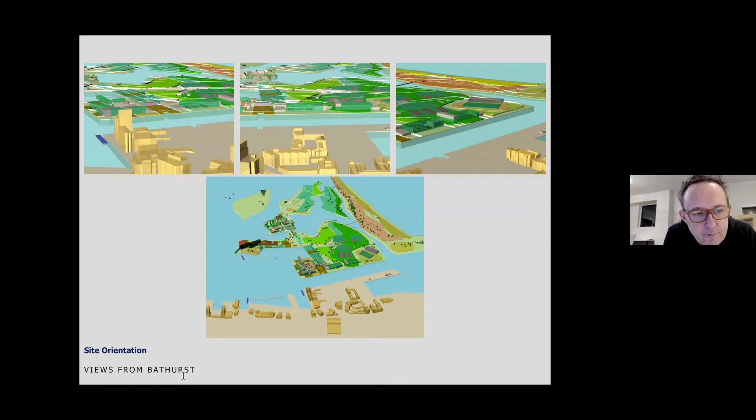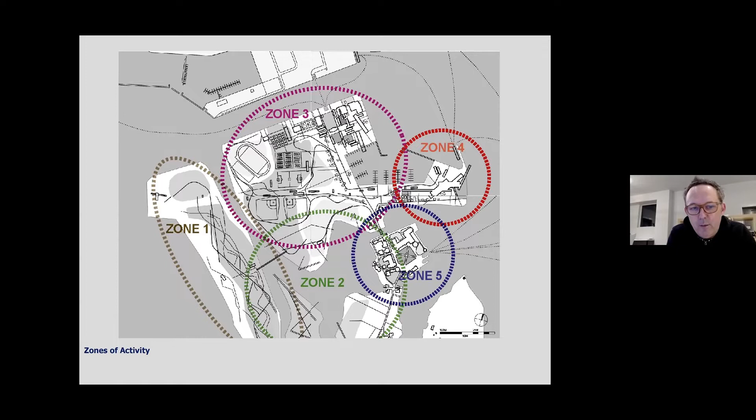At the time, we were very concerned about housing and things like that. Not that it wouldn't occur in this area, but rather you would have in one area at Hanlan's Point a kind of reconstituted Hanlan's Point, with possibly some bed and breakfast, some restaurants, and some overnight visitors—but you wouldn't really have people living in this area permanently.

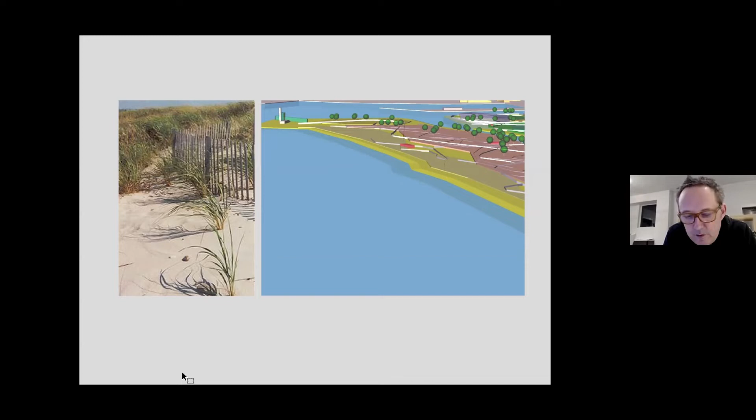So zone 1, beach and dunes. It's currently a beach, and a fairly secluded beach at that. So that would be maintained and augmented with various artifacts and fencing to help secure the natural environment along the beach—so it'd be like a dune park.

Zone 2, the quite interesting inner waterways of this newly reconfigured, or gradually reconfigured, site would really be a wetland and marsh area, accessible by small craft like canoes or kayaks. There would be boardwalks and various other natural features maintained, some small wooden bridges, et cetera, and it would hopefully become a habitat for birds and other small animals. It would be traversed through winding paths and boardwalks by weekend recreation, families, and other people that want access to the site.

So these are from our model—gives you, they're very abstract. We intended to keep this quite open-ended. Boardwalks—this is just an example of the kind of installations and things that might start to occur in an area like that.

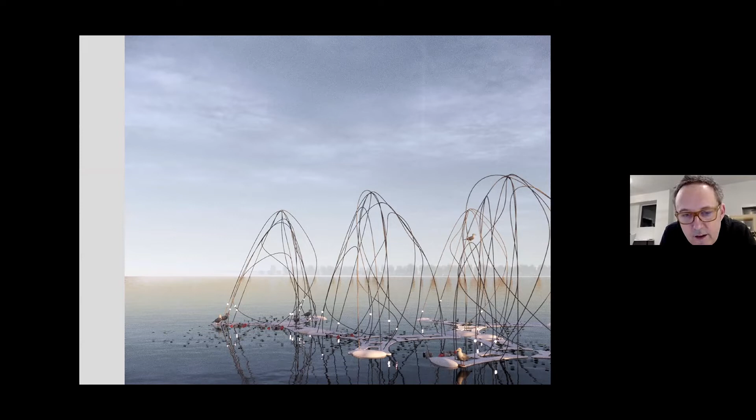Okay, zone 3, active recreation and markets. This is a pretty important zone really, because it is in a sense the interface between this new area that was the island airport and the city, for the most part. So what you have is the lower regions populated by sports fields, and the little tiny buildings you see would be like changing rooms and washrooms and things like that.

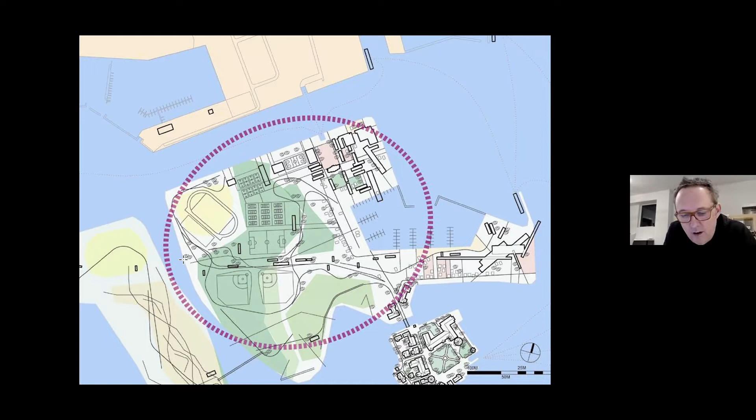And then up towards the upper part are the buildings that are the hangars and the airport itself, as well as the platforms and hardscapes, which would be maintained but become markets, market halls, exhibition spaces, and festival spaces. So it remains quite spacious out there—you'd have a lot of room to stage events. You could bring people in, and in the softer areas towards the marshlands and wetlands, there would be more like playing fields and things like that.

So these are some examples from the model and some collages. And then there's also a little bit of historical research—we were looking at what kinds of activities were happening in these areas previously, in and around Hanlan's. There was a lot of recreational activity historically.

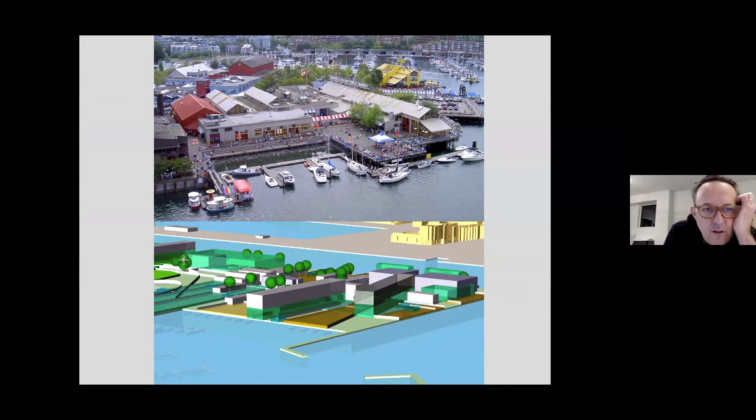This is, you'd all recognize, Granville Island in Vancouver. We thought even at the time that that would be a useful example for how you would reuse some of the buildings down there for the purpose of markets, et cetera.

And then this is just a collage that we did that takes you onto the quay, which is now pretty inaccessible, frankly, because it's the front platform of the airport—but it's right across from Little Norway Park and the silos. So this would be much more populated with people who would go over for the day, et cetera.

Okay, zone 4. This is the location, currently the very end of the runway on the east side. As soft as these diagrams or proposals are, there are some armatures that remain. So we put little buildings along the location of where the main runway was, and we use the end of that runway, which is a very prime site that would allow fantastic views of the downtown.

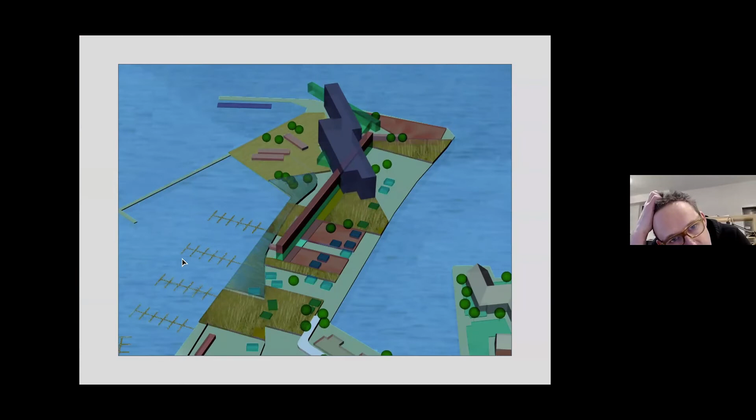I think it would be a feature site or cultural center of some kind, a center for the environment or an indigenous cultural center, something that would allow a reworking of this area through a cultural and indigenous lens. There's a little bit of geometry in these overlaid pieces. It would be the fancy cultural center affording views of downtown.

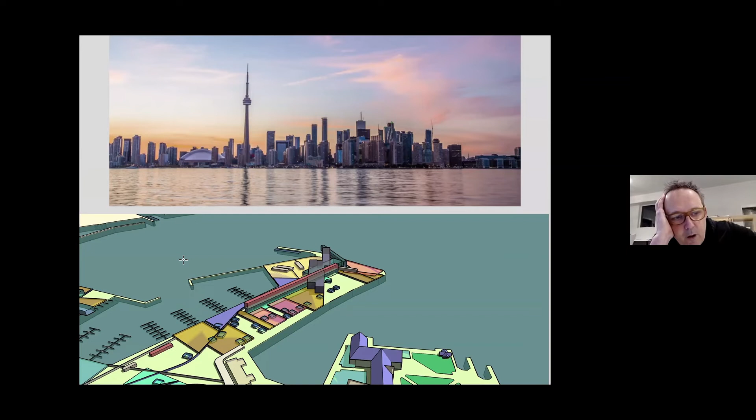So you'd have this beautiful site with a bit of a promenade that connects across to the market area. Just an example of what a building might be like in that moment, with lots of glass and views out to the downtown.

And then finally, zone 5, this is Hanlon's. It would rebuild Hanlon's Point in and around the ferry arrival terminal there. Well, it's not really a terminal, but we'd keep the little platform where the ferry comes in.

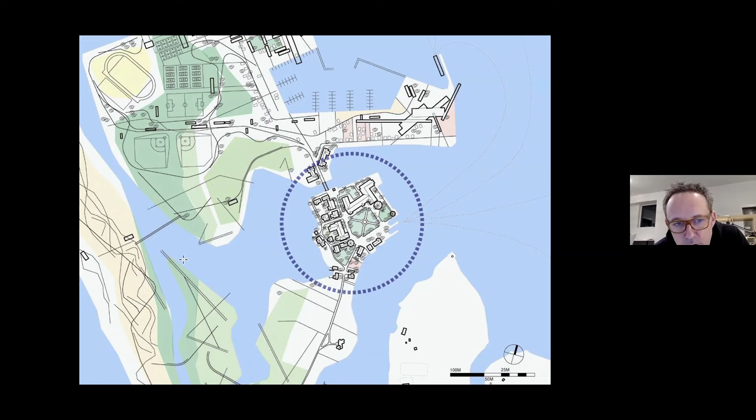There's a town square, a couple of small buildings that may be a bit more contemporary, or a little more historically driven. Hanlon's would become a hub again, like it was for a time, with some restaurants and maybe a couple of overnight little hotels.

So that's as far as we got with it. As I say, this scheme was characterized by a lot of ideas about diversity and inclusion, and I think those principles remain very important as far as how this site would be redeveloped for the benefit of Torontonians, not just travelers.

And then this is Grasett Park, connected to Ireland Park, so it's the cousin to Ireland Park, which is right across from the Island Airport site. This is down on Adelaide, and it's quite an important commemorative site that celebrates the work done by the local community at the time of the famine victims arriving from Ireland boat after boat in 1847, and how they were cared for. It's a small urban park, but it has the ambition of lasting the test of time and telling some of the stories of the city of Toronto.

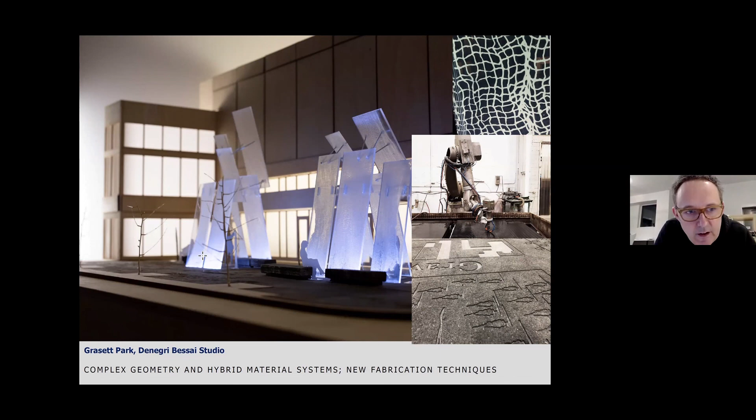I will go back to a slide that makes more sense here, let's say this one. And if there are any questions or comments, please.

Thanks, Tom. That's super inspiring, I could just be there, I could just see myself being there. So you did a really good job of presenting the possibility of this place.

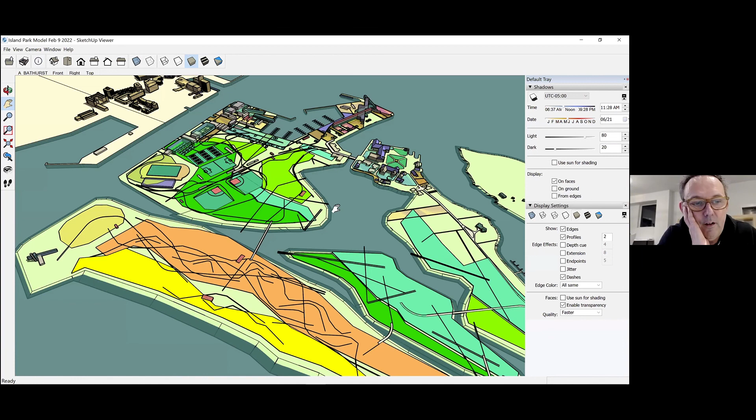Hey Joan, I'll just bring up a couple of things I can reference while we're talking. So one is this is what it looks like on Google Earth, back to an aerial view, and then the other is the actual - here, I'll pull this up for a second - this is like the 3D model of the thing we created at the time. This might be the best way to visualize what's where, if people have any questions.

You can see that it's pretty loose, but it does have this idea of these general zones, so I can sort of show that.